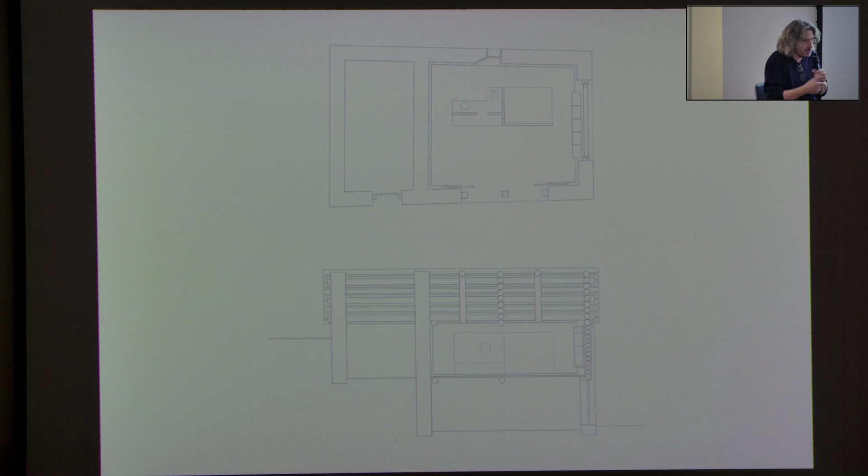I did not work on this area or this area because this is earth. If you want to transform this place into a living space for today, you would have to make a big intervention, a big transformation. But by concentrating on this area, which is the most detached from the ground, so it's dry with no contact with the earth, you can be quite simple in your intervention, without transforming too much the essence of the construction.

This is a picture inside, after the transformation, of course.

Okay, that's me 30, almost 40 years ago. This is a different situation. The building is still existing, it's not a ruin yet, but it is in bad condition. You cannot just do something inside like interior architecture, you just can't. So what I decided to do, a different approach, was to dismantle the building, take all the parts apart, and then rebuild it exactly the same, like the Japanese do, demolishing and rebuilding the same thing.

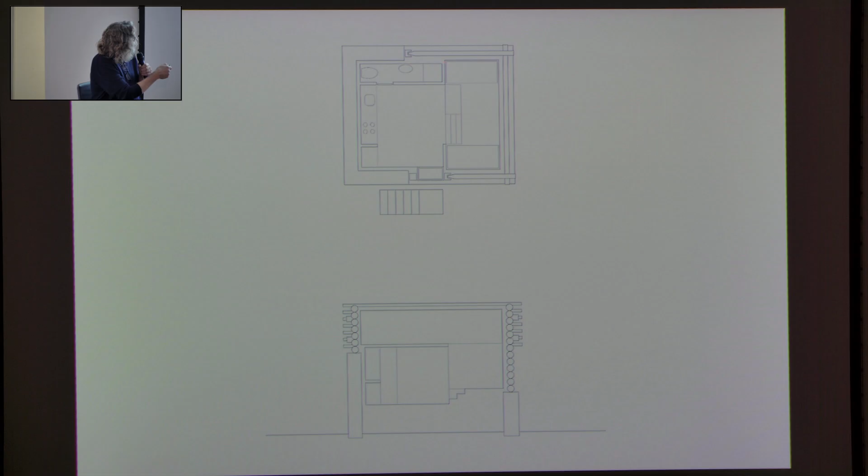This was the building after the reconstruction, just the same but straight. And then this is what has been done inside. In the previous case, it was a sort of core in the middle with the services. Here, the services are not in the middle, but on the perimeter. So it's a different concept. This building is much smaller, that's why it differs from the other one.

So the two previous buildings were transformed in order to be used as a holiday home. In this case, it was just a matter of repairing the roof. There was no client asking to transform it into a house for holidays, but the roof was starting to be in a very bad condition, a critical condition, let's say. So what I did here is just work on the roof.

And as you can see here, this man is sticking a new beam into the roof. So the roof has not been dismantled and rebuilt, but just by putting in some new beams, it's been repaired, as you can see there. And then I changed the detail of the encounter between the roof and the wall, as you can see in the next picture.

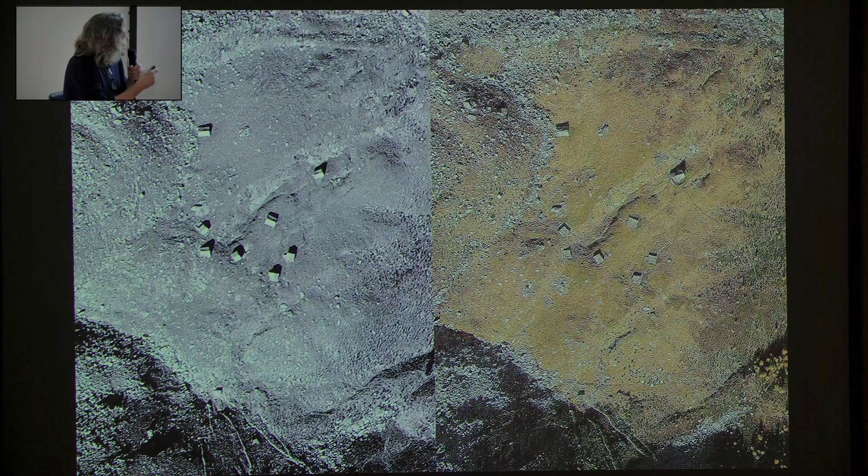Some more—I've done this with my students at the Academy of Architecture of the Università della Svizzera Italiana in Mendrisio. You almost don't see where the ruin is. It's here.

And this is the very last recomposition I did with my students, exactly one year ago, or eleven months ago. It was October 2024.

Oh, sorry, I forgot about this one. This was something we did even more extreme, if we want. We saw this building about to collapse, not collapsed yet, but about to collapse. Impossible to make a restoration - you could just make a reconstruction, but a restoration was just impossible. So we decided to anticipate the process of what I showed in the previous project by dismantling it respectfully, and creating a volume just like the others, but starting not from a ruin, but from an existing building.

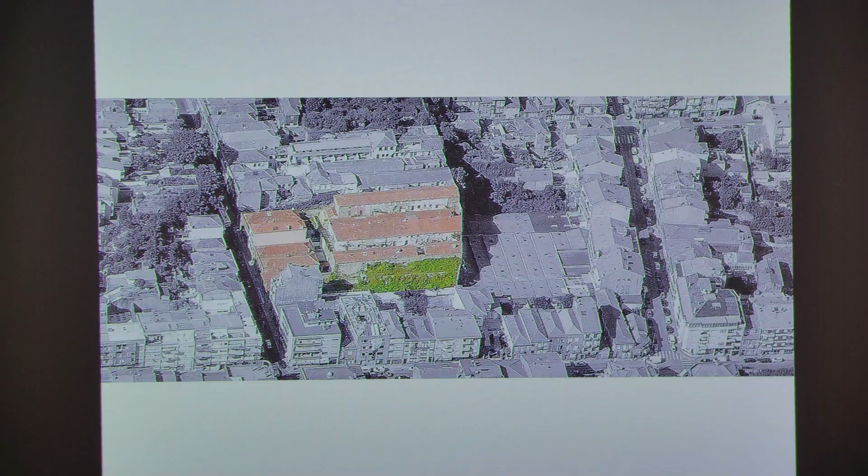E a área de intervenção é exatamente aquela. Portanto, é este desafio que nós temos e a decisão que se tomou depois de falar com as pessoas, porque foram as pessoas que lá vivem que nos convidaram para fazer esta intervenção, foi envolvermo-nos no projeto com eles, a convite deles, e resolvermos ocupar a ilha e viver na ilha com a equipe de arquitetos, antropólogos, sociólogos, durante quase 2 anos e meio. E este compromisso que assumimos com as pessoas punha-nos a questão de como é que nós conseguíamos compreender, de facto, aquilo que era importante construir-se.

Nós olhamos para esta imagem e, numa perspectiva higienista de um arquiteto, achamos que há muita coisa para remover. Esta perspectiva de nós centrarmos a arquitetura naquilo que é o objeto e não naquilo que são as camadas de informação que nós podemos obter numa imagem como esta, era uma coisa para a qual eu não estava habituado. Mas olhando para esta imagem, percebo que o espaço é profundamente ocupado.

Há um pensamento que diz que escassez significa apropriação. O que quer dizer que aquilo que nós não encontramos na casa, temos que procurar fora. E aqui claramente há uma marcação de que a casa se estende para o espaço exterior. Este espaço exterior intenso, vivido, com muitas relações de proximidade, estamos a falar de casas muito próximas, e que nos interessava compreender. Mais que valorizar os edifícios que cá existiam, era tentar compreender todos os upgrades, todas as alterações que foram feitas ao longo da sua história, dos 150 anos, pelas pessoas, com muito poucos recursos, e que faziam uma intervenção absolutamente cirúrgica naquilo que era importante fazer.

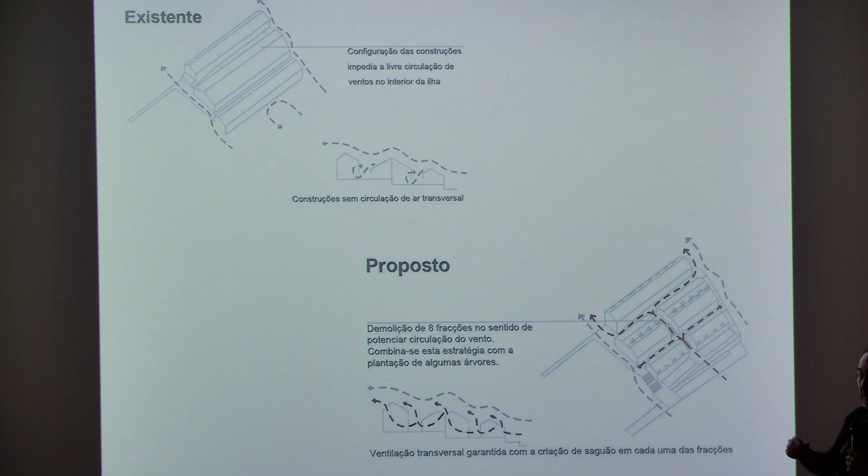A questão da salubridade e da ventilação não existia. O facto de criarmos a rua permitiu, fazendo um vazio dentro das casas, haver circulação transversal dentro, o que não acontecia, porque as casas eram, como se diz em Portugal, 'de cu tapado' — não tinham janelas atrás. Havia casas que tinham uma janela e uma porta, e outras com 2 pisos que tinham 3 janelas e uma porta, e não dá para fazer mais do que isto. Portanto, o saguão, o pátio que criámos atrás, permitiu esta possibilidade das casas ventilarem e resolveu um problema grave de salubridade e ventilação.

Este aspecto é importante porque a ausência de circulações alternativas também era um foco de conflito e tensão entre os moradores, isto é, só havia uma entrada e uma saída. Isto criava um efeito quase policial, as pessoas sentiam-se policiadas, sentiam-se quase vigiadas. Era importante quebrar este sentimento de vigilância, de apropriação que viola a privacidade da pessoa. E isso conseguiu-se com esta nova solução, resolvendo muitos conflitos e muitos impasses de tensão que existiam.

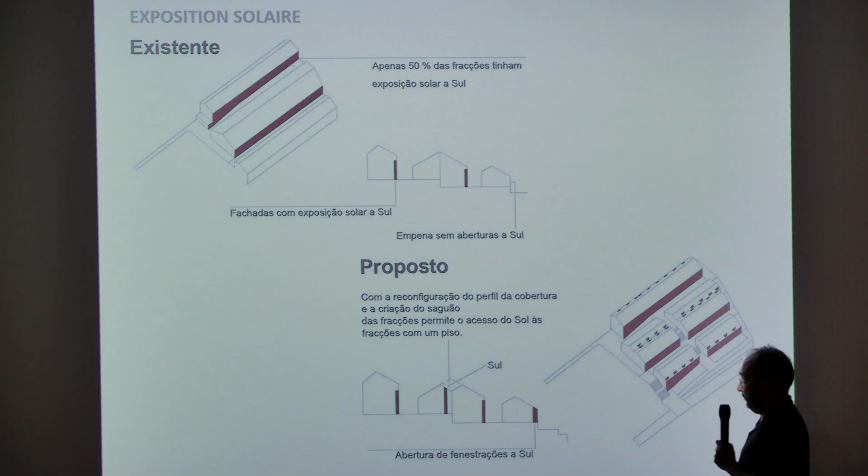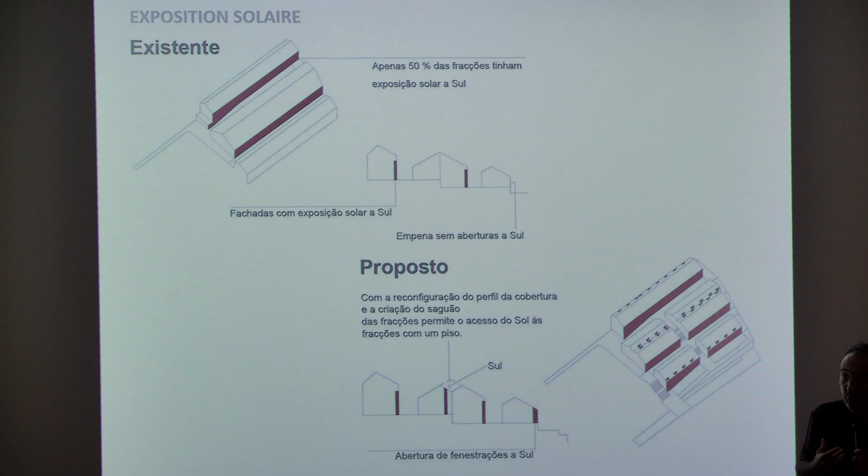Outra questão é que metade das casas tinham sol e metade não tinham. Portanto só metade estavam expostas ao sol, as outras tinham, para além da ventilação, o problema de não ter incidência solar. Estamos a falar do Porto, com clima severo, que precisa de sol para corrigir os meses de inverno de chuva intensa. Aquilo que foi feito foi simplesmente abrir janelas para o terreno atrás, e fazer o rasgo da cobertura desta forma para que estas casas pudessem ter sul dentro delas. Assim conseguimos garantir que todas as casas têm sol a entrar, o que é muito valioso em Portugal, especialmente no inverno.

Outro aspecto é que é uma comunidade muito pobre, com renda familiar abaixo de 200 euros, ainda hoje, e portanto todas as questões económicas são importantes. Isto é, mais sol, menos gastos de energia.

O projeto foi todo pensado numa base de sustentabilidade, não só de reduzir a pegada ecológica dentro da própria cidade, mas também, e acima de tudo, trazer benefício para a comunidade em si, em termos de reduzir custos, como é lógico.

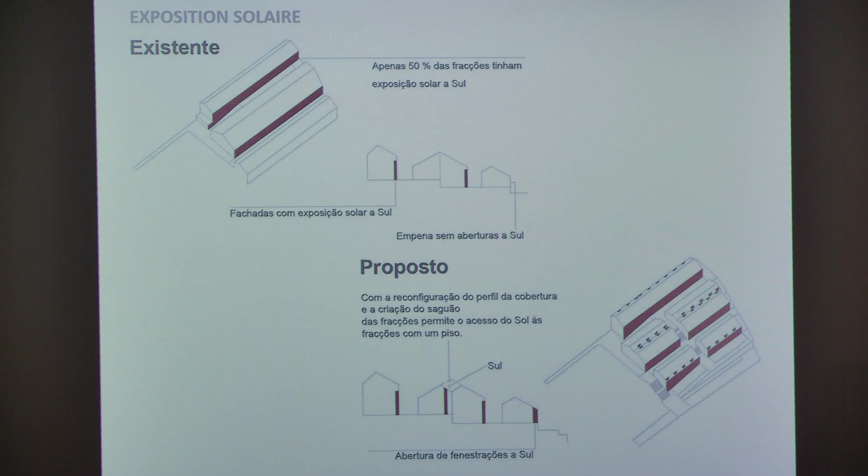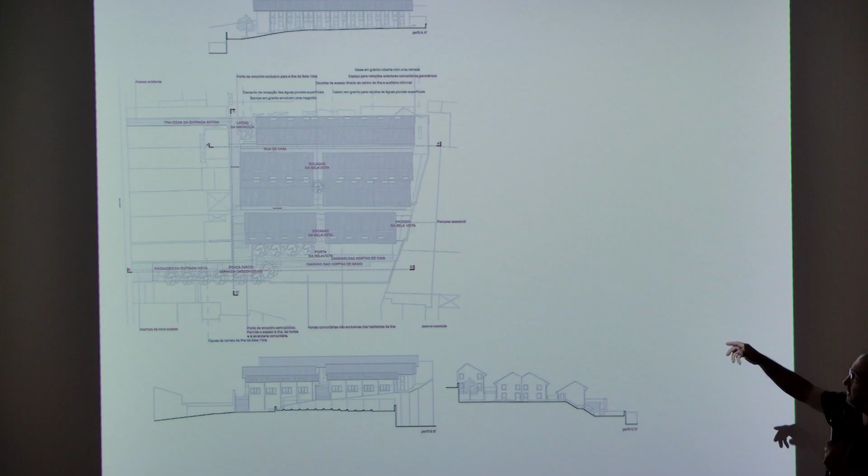Isto é a organização do espaço. Demos nomes às ruas, as ruas não tinham nome, e quem deu o nome foi a própria comunidade que se juntou e que deu o nome: a rua de cima, a rua de baixo, as escadas da Bela Vista, o Largo da Magnólia, por aí fora. Foi uma reunião que tivemos com as pessoas e elas decidiram fazer a indicação dos nomes na rua. Podemos passar à frente?

Aqui é importante porque passamos dos 10 metros quadrados para 18 metros quadrados por habitante. Passamos a ter uma área exterior de 3, que passou para 12. Reduzimos um pouco a área de construção, que era de 1 para 1, passou para 0,87 para 1, e aumentamos de 34 ou 36% da área sem construção para um indicador de 58% sem construção.

São indicadores que caem perfeitamente naquilo que são as obrigações que os planos do Porto obrigam. Portanto, conseguimos garantir uma percentagem permeável superior a 40%.

E as persianas, de uma forma inexplicável, existiam do lado sul, mas também do lado norte. Quem tinha janelas viradas a norte tinha persianas quando não havia necessidade absolutamente nenhuma. Porque é que pessoas com muito poucos recursos, sem dinheiro para gastar, foram gastar dinheiro em persianas em fachadas viradas a norte? Porque a persiana, num espaço tão contido e apertado, não serve só para controlar o sol, mas serve para controlar os níveis de intimidade que as pessoas estão disponíveis a ter naquele momento. Aquilo que consegue garantir a permeabilidade do espaço público para o espaço mais privado da casa é feito com uma persiana. Portanto, as persianas têm que continuar a existir, mesmo nas fachadas a norte, que era uma coisa que eu claramente não iria pôr, obviamente, não é?

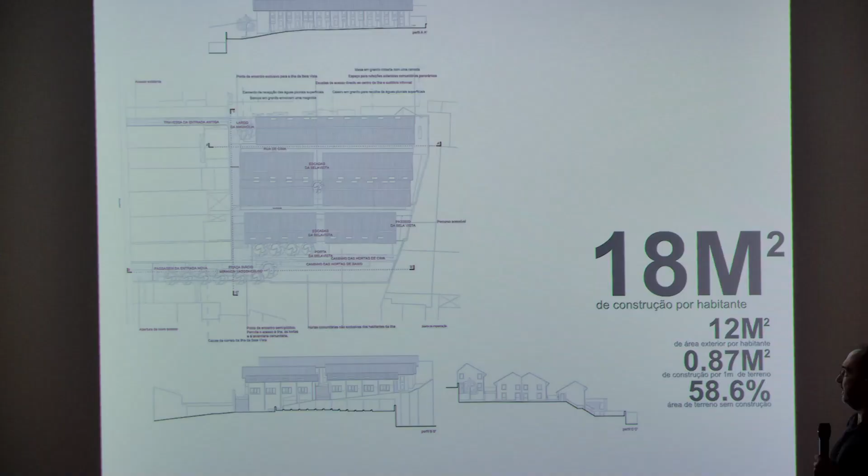Podemos passar a seguir. Temos o prolongamento dos telheiros que tínhamos na cota de baixo, fazemos a extensão da cobertura para fora, garantindo este espaço de cobertura não confinado só à dimensão da porta, mas no comprimento de toda a casa, o que é uma maior valia em relação àquilo que eles tinham. A persiana é colocada, e depois vou explicar mais à frente, não no parapeito interior, mas para fora, garantindo uma maior capacidade de desempenho que explicarei à frente.

As cadeiras que víamos são estendidas para banco e o tanque mantém-se cá fora. O tanque já existia cá fora e voltámos a reproduzi-lo cá fora. Se começarmos a ver, temos a água das chuvas que cai no tanque. As pessoas têm poucos recursos, a água do tanque serve para lavar. Temos as águas das chuvas a cair novamente no tanque. Temos uma linha de água que recolhe as águas pluviais à vista, e nós reproduzimo-la à vista também.

Temos janelas com as persianas onde se pode colocar um vaso, durante o dia uma gaiola de um pássaro, ou o que for, e mantemos o espaço, criando até mais espaço do que tinham originalmente, para as pessoas continuarem a estender a sua vida interior para o parapeito da janela. Havia um aspecto interessante: reparávamos que as janelas estavam sempre ocupadas, e aqui entrava a importância da cartografia e de registar os usos.

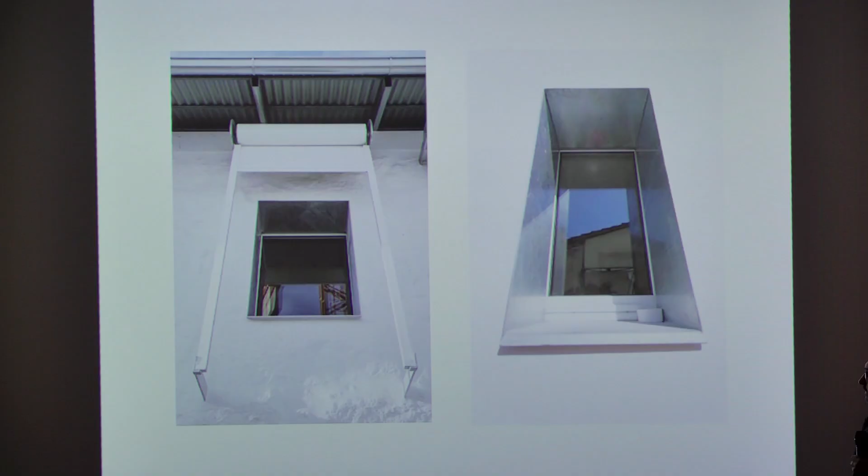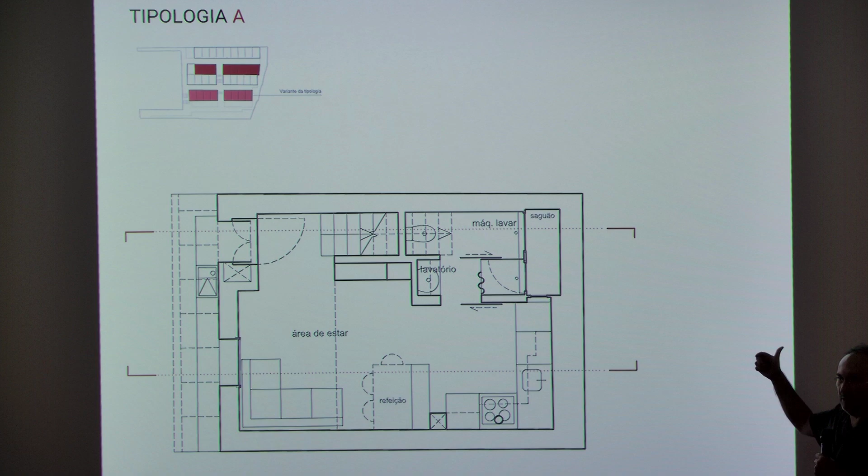Pronto, aí, lá está, as janelas, aquilo que é o desempenho, aquilo que nós acrescentamos, repetindo aquilo que nós vimos lá. Simplesmente, tecnicamente, podemos melhorar um pouco mais - o alargar das coberturas para criar espaço coberto por baixo. As tipologias, eu não vou me alongar muito a explicar as tipologias, vou explicar mais os números que significam cada uma delas. Podemos avançar, vamos ir correndo.

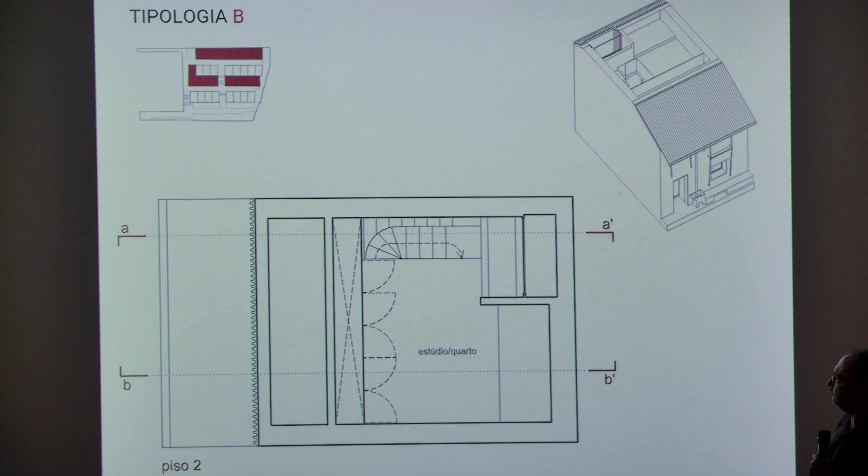Aqui sim, paramos. O que é que permite uma persiana não estando encostada ao vidro? Permite fazer um eficiente controle solar quando está virada a sul, porque permite que a persiana não tenha que fechar completamente para impedir que o sol entre dentro de casa. E ao acontecer isso, permite que durante o dia, no verão, as pessoas não tenham que acender a luz elétrica. Como a persiana está afastada do vidro, criamos um espaço, um gap, que permite que ela funcione como uma pala, semelhante a uma pala. Por outro lado, se baixar um pouco mais, permite que quem passar na rua não veja para dentro e a luz continua a existir. Portanto, esta questão é muito...

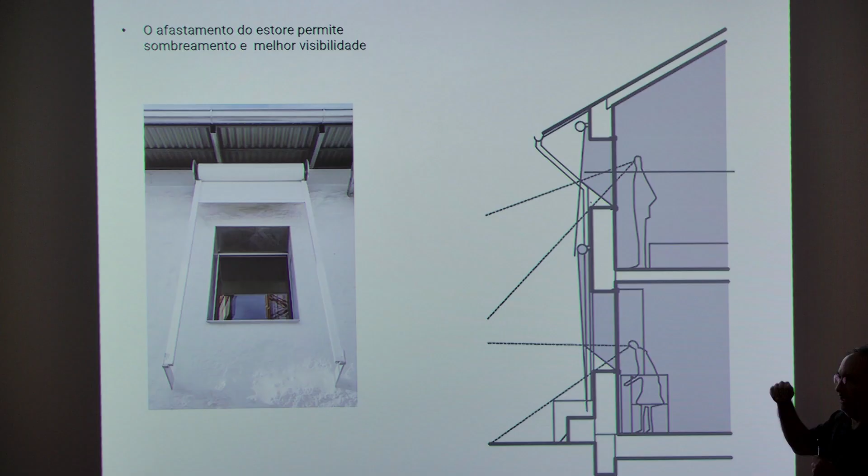Obviamente que estas persianas não estão para impedir que à noite a casa fique em escuridão absoluta, mas permite, alargando a dimensão da persiana para a dimensão que o vão tem, e criando este afastamento, criar uma performatividade à persiana que ela não tinha originalmente.

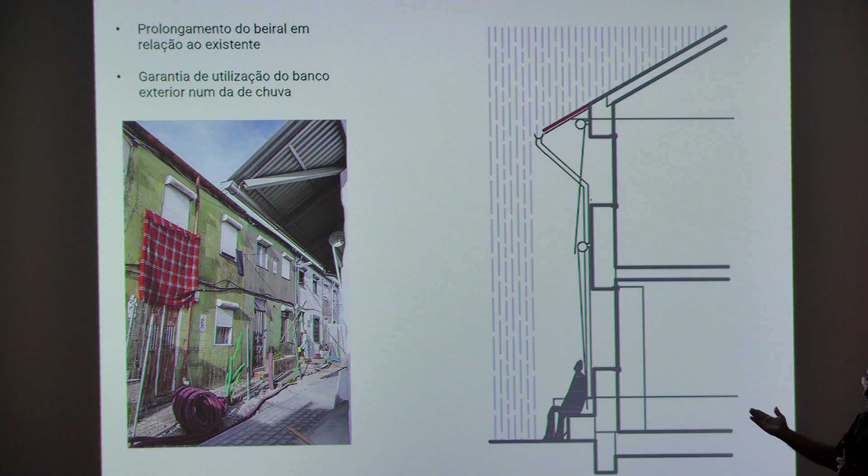Este prolongamento do telhado permite que as pessoas possam ocupar o espaço por baixo, como tínhamos explicado. Estamos a fazer aqui o resumo da intervenção. E aqui é inacreditável, porque quando fizemos as contas nem nos apercebemos que o ganho era este. O que é que nós fizemos?

Os vãos da caixilharia foram colocados por trás da parede. Portanto, a caixilharia, em vez de estar no meio do vão, ficou por trás, e toda a área útil do vão foi ocupada com vidro. O que significa que nas portas ganhamos 204% de vidro e nas janelas ganhamos 41,9%. Basta tirar aquilo e pôr assim.

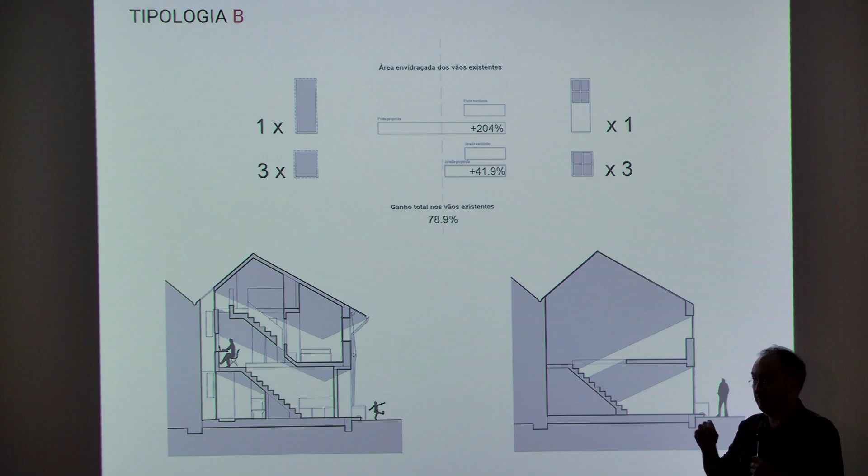Isto para quando temos casas com uma janela e uma porta, e casas com 3 janelas e uma porta, é um ganho enorme, imenso. Mais uma vez, uma pequena mudança, sem grande significado, sem ter que fazer uma obra de alargamento do vão.

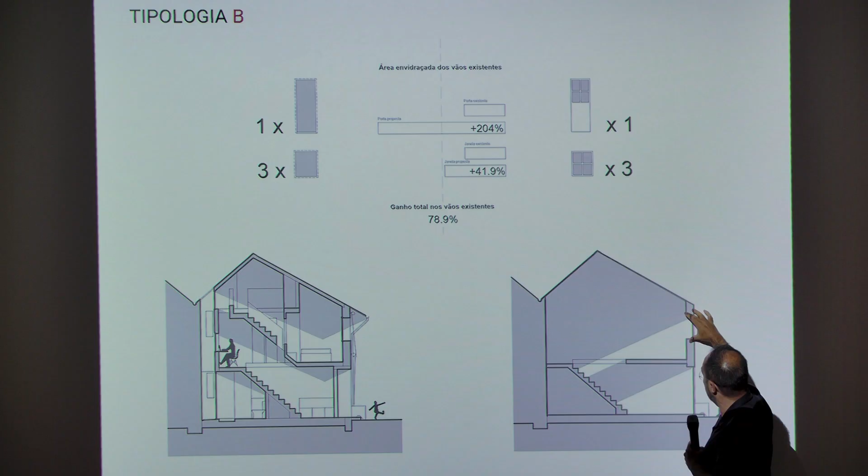Simplesmente colocando a caixilharia numa posição mais secundária, e criando o pátio atrás, permitiu que a iluminação que entrava na casa, que era muito pouca, aumentasse. Criámos um pátio atrás, muito pequeno, com 60 por 1,40 m, que permite, refletindo, estender a luz dentro da casa.

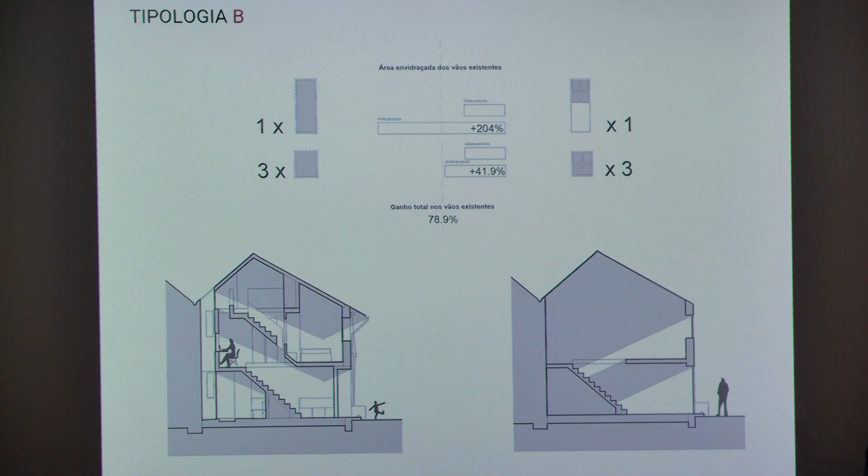Agora, um dado que não posso esquecer: estas casas estão em encosto, porque estão em patamares. Os encostos recebem quantidades brutais de água, porque é uma zona de nascentes de águas dispersas e descontroladas. Se não houvesse aquele saguão, se não houvesse esta proposta de organização, de retirar a casa do encosto, a casa era muito bonita, entre aspas, mas passado meio ano era inabitável, exatamente como nós a encontramos.

Aquelas pessoas viviam de uma forma perfeitamente desumana. As umidades, os cheiros - nós estivemos lá e houve alunos que abandonaram porque não aguentavam com os cheiros, com os aromas, com o frio. Mas os moradores viviam ali. Portanto, este saguão é um elemento fundamental para ventilar, para arejar e para trazer luz para uma casa que era 99% insalubre.

Mais uma vez, a contabilidade. Como a área da casa era contígua, este diagrama explica que, com a distribuição que fizemos, só temos área desperdiçada na escada e naquele átrio de entrada. Toda a restante área é útil. Criámos uma casa com o menor espaço desaproveitado possível, como corredores e entradas. Conseguimos passar de uma área útil de 89% para 95%, comparando com a solução original.

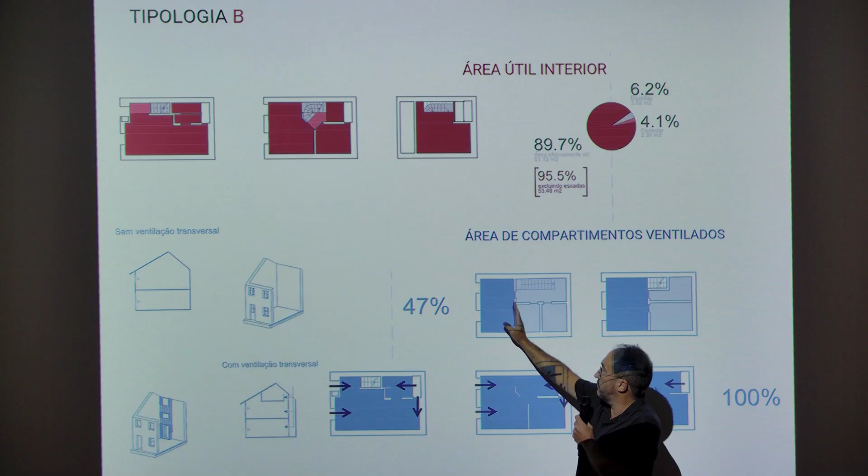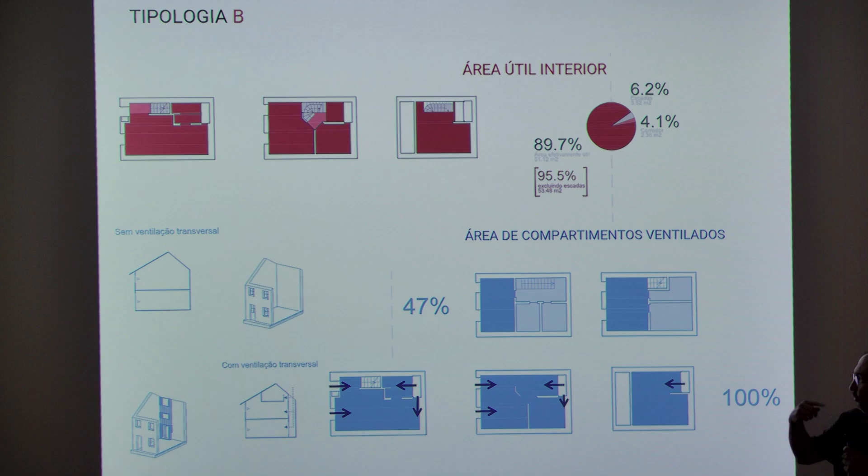O edifício original só tinha compartimentos com janela, marcados mais escuros. Ao criar o saguão, conseguimos garantir que todos os compartimentos, inclusive a casa de banho, têm ventilação direta, o que garante renovação de ar dentro da casa. Também a área de envidraçado versus a área útil é uma conta que nós, arquitetos, temos que fazer: passou de 5% da área da casa com janelas para 17%.